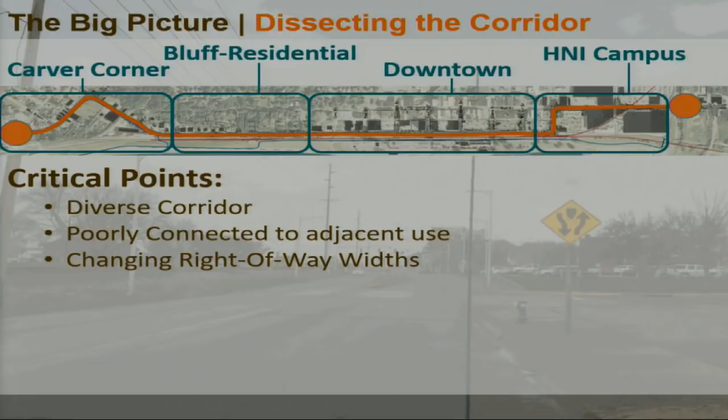So some of the design criteria that we tried to accomplish for the corridor as a whole: we looked at a 25-mile-an-hour posted design speed limit, 1 travel lane in each direction with center left turn lanes where applicable, a variable median width based on which district we're at, and also the available right-of-way and physical space that we can work with.

EMS access was always important to us, and that's one of the reasons we looked at mountable curbs and mow strips in the median areas. If you drive out there, you'll see it's an angled curb instead of a barrier curb, so that can be easily gone over. And here again, back-in angled parking on the north side of the road only.

We knew that parking was most important on that north side of the road because of all the businesses on that side, and we didn't have the capacity to put parking on both sides of the street, so we really focused our efforts on that side.

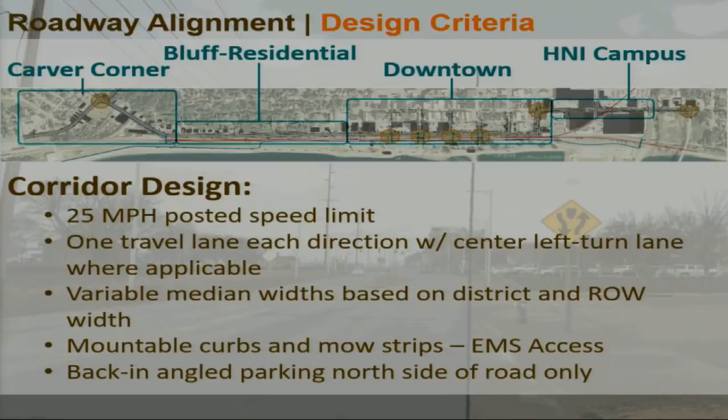So I'm going to go through a couple of the districts and talk about roadway widths. I'm going to talk a little bit about travel lanes, and a travel lane is really just the driving lane that you're going through. It's not a median, it's not the curb, it's not any buffer or slip zone areas, it's the lane that you go down.

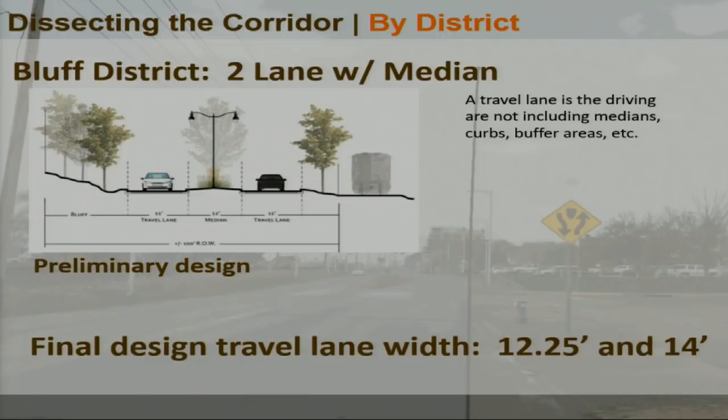Throughout the preliminary design process in the Bluffs district, we looked at accomplishing that travel lane with an 11-foot width. When we finally got into the final design, we actually widened those out to a 12.25-foot travel lane going upstream and a 14-foot travel lane going downstream in the Bluffs area, here again with those mountable curbs on the medians to be able to sneak around.

In the downtown area where we have parking, here again we looked at 11-foot drive lanes in the preliminary design process. Now the character is a little different depending on which side of the street you're on. On the downtown side, we have back-in angled parking, a buffer zone between that parking and the travel lane, and then the travel lane: 16.5 feet of parking, an 11-foot travel lane, and a 3-foot buffer lane on that side.

On the upstream side of things, instead of the 11-foot travel lane as per the preliminary design, we actually widened that out to about 12.25 feet.

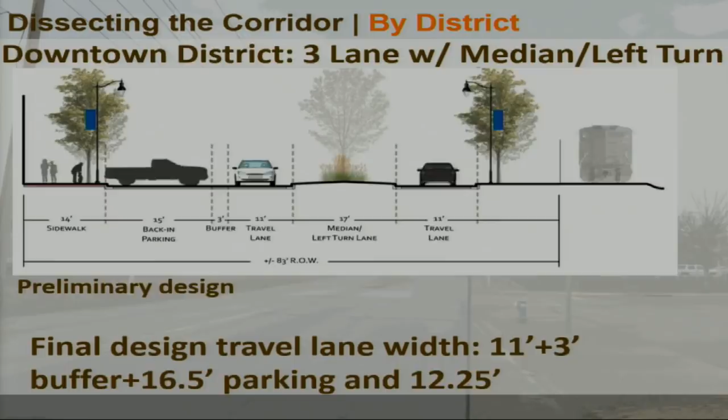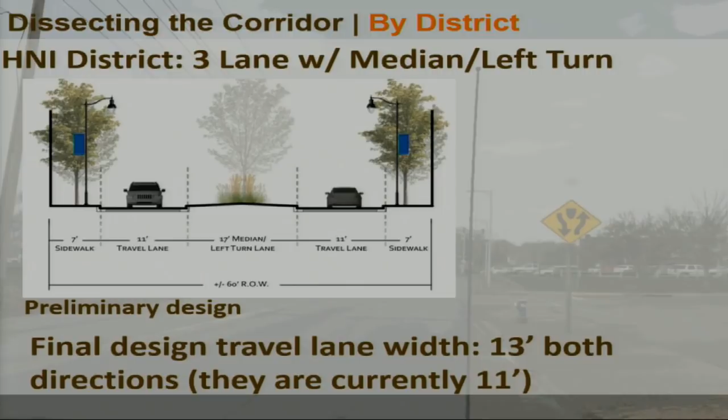And then the final district I want to talk about is what we're calling the HNI district. It's 2nd Street from Mulberry to Mad Creek. In the preliminary design here again, we looked at 11-foot travel lanes. Just to give you a point of reference, the lanes that are striped out there currently are 11 feet. It is a 4-lane section currently, but it's pretty tight through there. The final design travel lane width, which is not constructed yet because that's one of the next phases of construction, is actually 13-foot lanes through there with median and turn lanes.

So a little bit about the medians. All medians have a 6-inch high mountable curb. They also have at least 18 inches of concrete behind them. In many cases, the concrete's all the way across the median, or it's bricks in that area with concrete underneath the bricks, so it can handle a heavy load.

A lot of the reasoning we did that: it allows emergency access if needed to sneak by. It deters those drifters, the distracted drivers, the texters, when driving, keeps them within the lane. It guides plowing operations in the winter, and it also provides for future maintenance overlay. You know, 20, 30 years down the route, if we're putting an asphalt overlay, we still have the storm sewer capacity to it instead of doing it down flush or only a 1-inch curb.

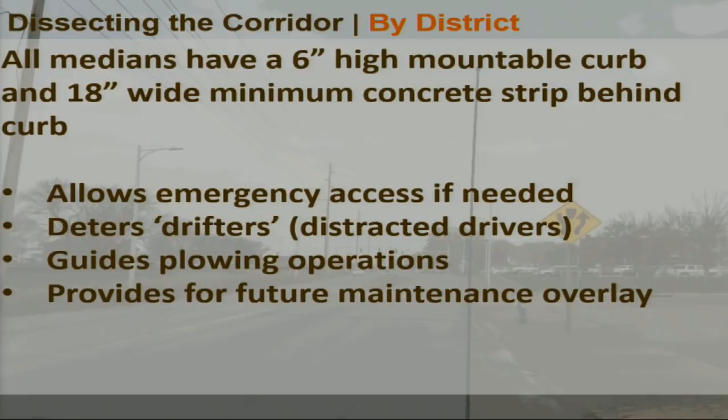We also don't want everybody and anybody just crossing over a median too. It's really designed for emergency access. It's not to jump, just do a U-turn anywhere. So it's that balance that we're looking for.

I'm going to turn it over to Joe Spradling. He's going to get into a little more of the technical side of things on some of the efforts.

Evening, Mayor and Council. Joe Spradling with HDR. We're a sub-consultant to Bolton & Menk on the design team. I'll direct your attention to the screen. I'm going to get, like Jim said, into a little bit more of the detail.

The area that we're looking at here is just to the downstream side of the bluff area, and this is at Broadway. Really what we're looking at here is how does this operate through the bluff area, especially in an emergency situation. There are 3 options, and really this first option is kind of the preferred option, what we want people to be doing. So if there's a stopped vehicle, a stalled vehicle, or there's an accident, we might have a stopped car.

But in certain situations where we don't have a stalled car, we want people to pull ahead to an area where EMS can move around. What we have shown here is an aerial ladder truck, which is the largest truck that the fire department has, around 42 feet in length. So you can see what our preferred alternative is: to have people pull up, you can pull around in the center and left turn lane. Conversely, or in addition to that, the vehicle could pull up into the parking that's just downstream of that, and the emergency vehicle can pass.

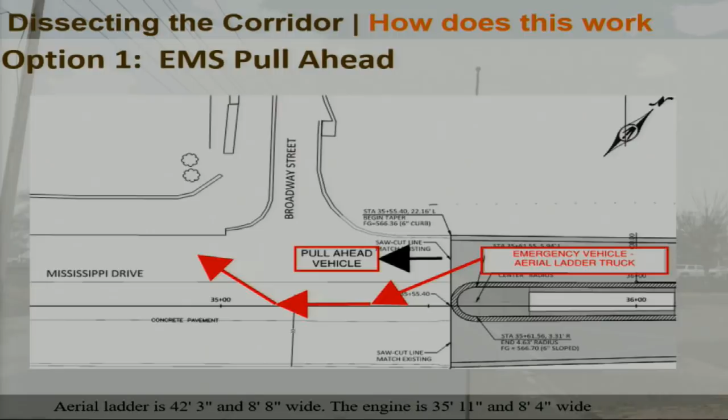Another option, if that's not possible, if there is a stalled vehicle or an accident in the lane, like Jim mentioned, the medians have mountable curb, so they're designed to drive over. Currently through the bluff area there is no landscaping, but this landscaping has been designed to be traversable as well. It's obviously not what you want to happen, but in an emergency situation that can happen. So this is just an option where the stalled vehicle or accident is in the lane: the fire truck can pull around onto the mountable curb, onto the median, and then around the stalled vehicle or accident, and then continue on.

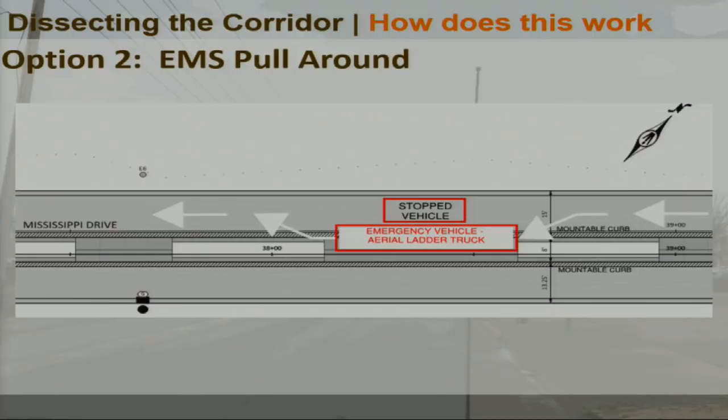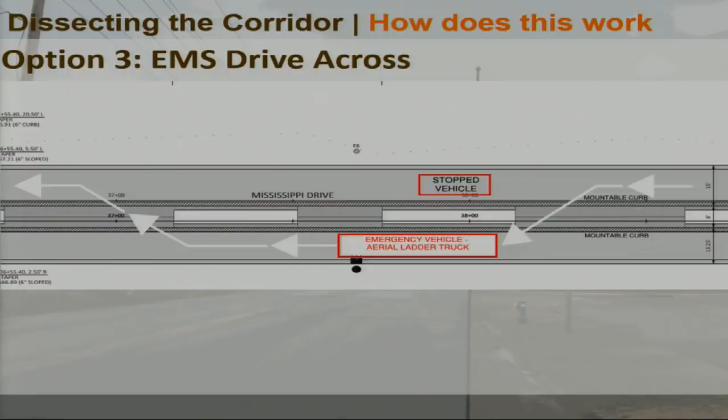Maybe just a couple things to point out here, a couple of the constraints that we were looking at through design of the bluff. We were very sensitive to impacting the bluff area itself, just with possible unstable soil. We were trying to avoid that area, impacting that area at all.

Also on the slope between the roadway and the railroad, there was some old retaining wall there that was kind of failing. You've probably seen that out there, and some of the slope has been failing as well. So we were trying to avoid large retaining walls that get very expensive, and conversely trying to do a slope that would work and tie down.

So you're not alone in Muscatine. There are other areas that do have one lane in each direction with a raised median.

This is an example in the Des Moines metro area, in Grimes, on State Highway 44 just west of town. It's very similar to the Bluff area, however you can notice the median actually has a barrier curb, so it's not technically traversable. But again, you can see the more narrow lanes, one lane in each direction, and there's a significant length, about 1,300 feet. In comparison, the Bluff area in Muscatine is about 700 feet in length.

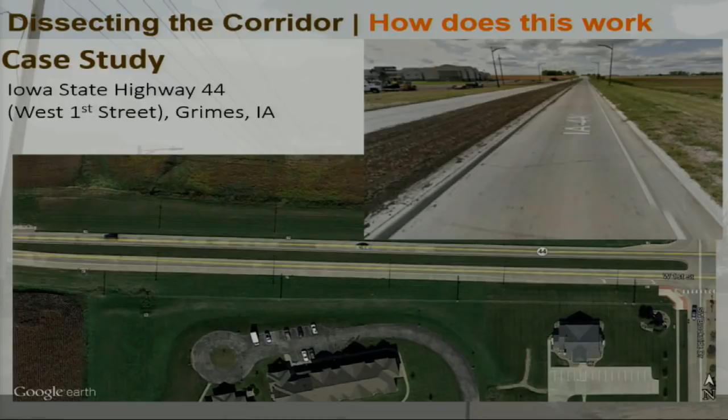Another case study we found is also in the Des Moines metro area, the City of Ankeny. This is a very similar situation - a barrier curb median, one travel lane in each direction. The amount of traffic on these is very similar to what you have on Mississippi Drive.

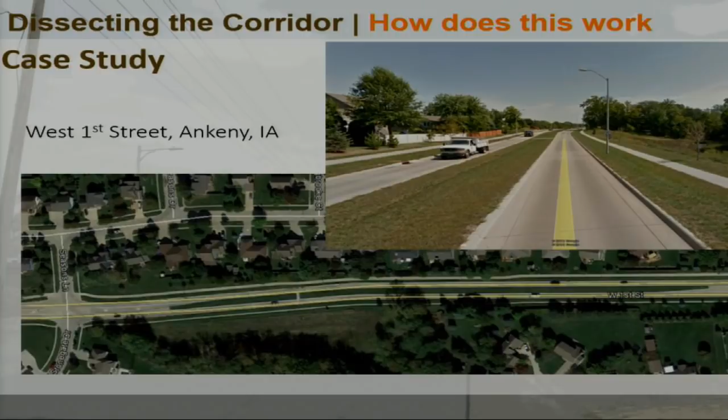One case study outside of Iowa is a very similar type of what they call right sizing the street. This is in Poughkeepsie, New York, on Raymond Avenue. The image on the left is the before picture - you can see there's 4 travel lanes undivided. It's a congested downtown area, very similar to downtown Muscatine, with parking on both sides. On the right is after the conversion - they took it down from 4 lanes to 2 lanes with a traversable, mountable median, and maintained parking on both sides of the road.

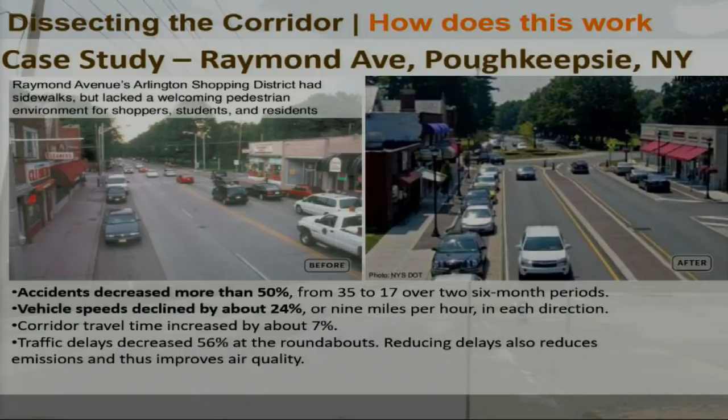What's interesting is what they saw - it's a case study because they've had it in place for about five years or so. They noticed accidents decreased by 50%, from 35 to 17, over two 6-month periods. They also saw vehicle speeds declining by about 24%, translating to about 9 miles per hour. They saw very minimal corridor travel time increase of about 7%, and traffic delays decreased 56%.

They also did some roundabouts - there's one you can see in the right picture up at the top, that's a roundabout they put in place. They saw traffic delays decrease by about 56% with that in place.

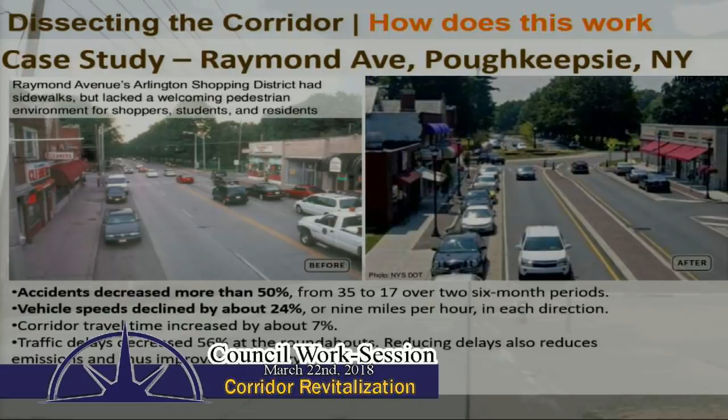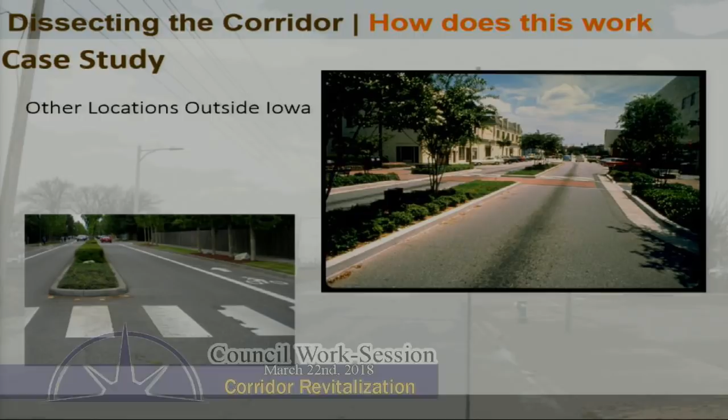These are just some other shots around the country showing that raised median look, kind of traffic calming. I think the biggest idea here is to improve pedestrian crossings. If we can narrow up the road, shorten the pedestrian crossings, calm that traffic and get them slowed down, it makes it safer for everyone - safer for pedestrians, safer for bicyclists, and also for the traveling public, motorists through the area.

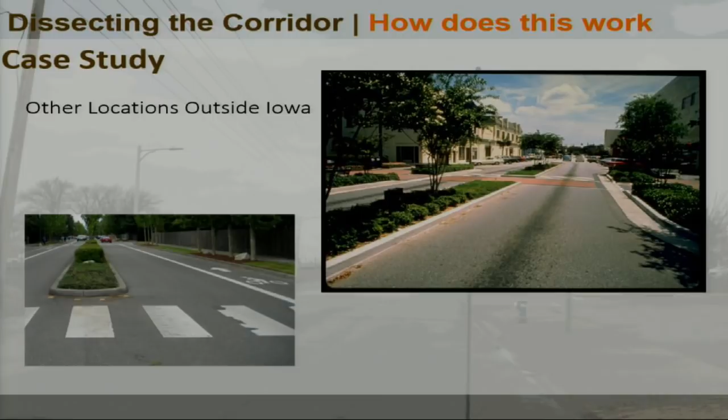Now Jim's going to come back up and talk a little bit about some of the intersection details and design that we went through.

Thanks, Joe. We're going to go quickly through some of the ideas this design was developed around. One idea is a pedestrian refuge and a shortened crossing. The noses at the medians at intersections go out just beyond the crosswalk, by design. We want to make sure there's an area for pedestrians - we call it a pedestrian refuge, a rest area for people who aren't necessarily able-bodied to get across the roadway safely, only having to cross one lane, one direction at a time.

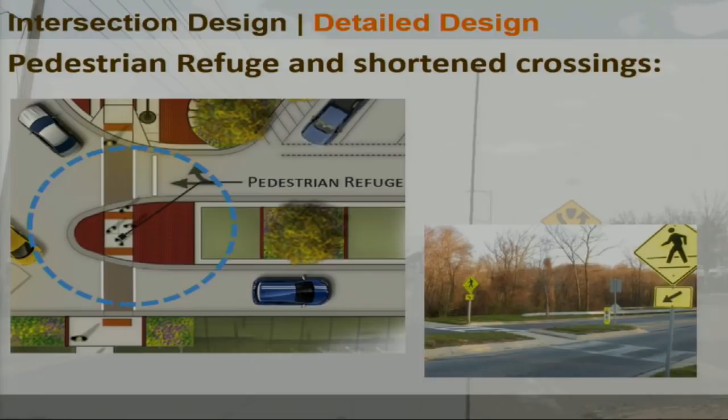These are designed so trucks can actually drive over the nose of the median. We know not everybody is a rock star as far as a truck driver, and we need to accommodate so they can still get around those intersections even if they aren't the best drivers. We designed these intersections specifically in the downtown area for service trucks to make easy turns into downtown - a beer truck, a beverage truck, a UPS truck, that level of effort.

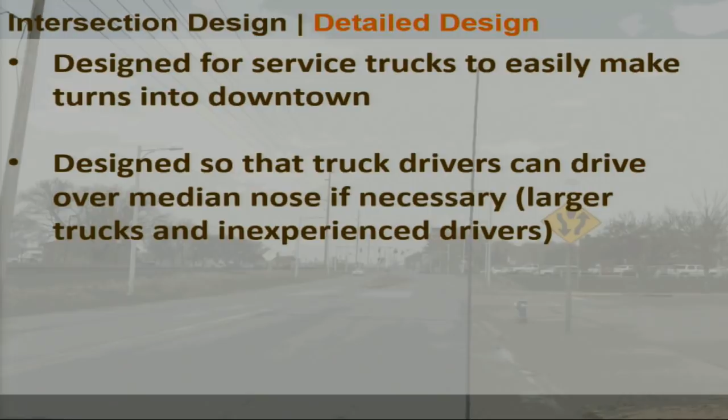There are 30-foot radiuses on the intersections. Just to give you an idea, the next block up at Second would probably be a 10 or 15-foot radius. So we designed it so truck drivers can go over those medians. We also made sure we didn't want to encourage making the whole downtown a truck route at the same time - it's that balance we're striving for.

So at Iowa Avenue, we have the new hotel entrance area right at the intersection there. I know there's been some questions and some problems making that turn as far as some driver confusion.

A couple things we're looking at doing, actually I was down there and they've done some of it already, is a reconfiguration of the median at the hotel entrance so that it's flatter, so trucks, if they for some reason can't make that right turn, can go right over it.

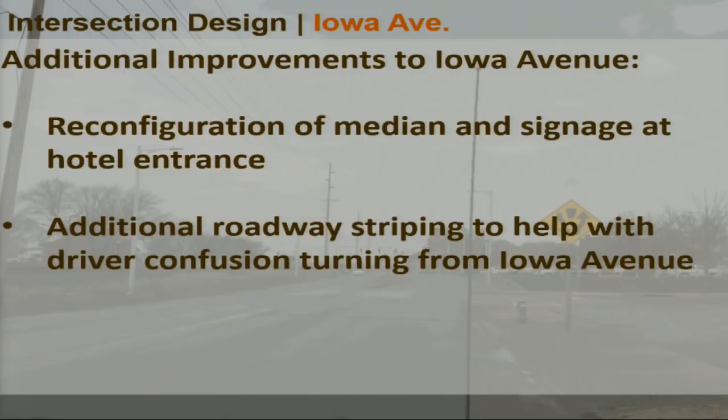We're also looking at additional roadway striping to help with driver confusion turning from Iowa Avenue. There's been discussion about people turning right off of Iowa and being confused whether to go into the hotel drive or the roadway itself. We're looking at additional dot striping to follow the arc to get people to stay on the public right of way instead of the hotel entrance.

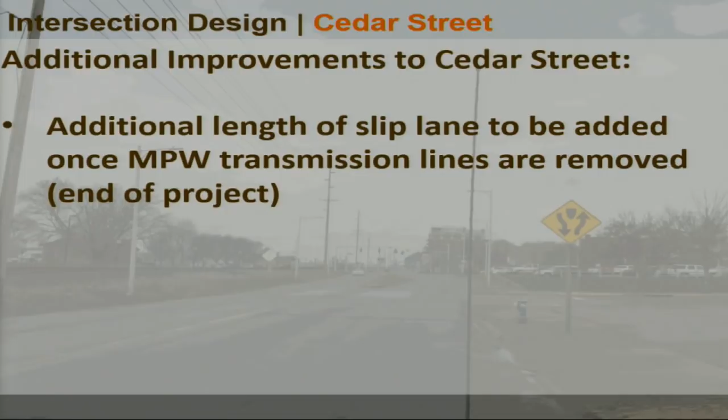At Cedar Street, one of the discussion points during the preliminary design process was the ability to stack some vehicles as you're turning right into Cedar in case there's a train. We've put in a fair amount of slip lane there, but don't think it's probably enough at this point to have a semi and a car there, or large boats and vehicles.

One of the issues at this point is transmission lines for Muscatine Power and Water. Those will be coming down, but not until the end of the project. Once those are down, we can add additional length to that slip lane, that right turn lane into the park.

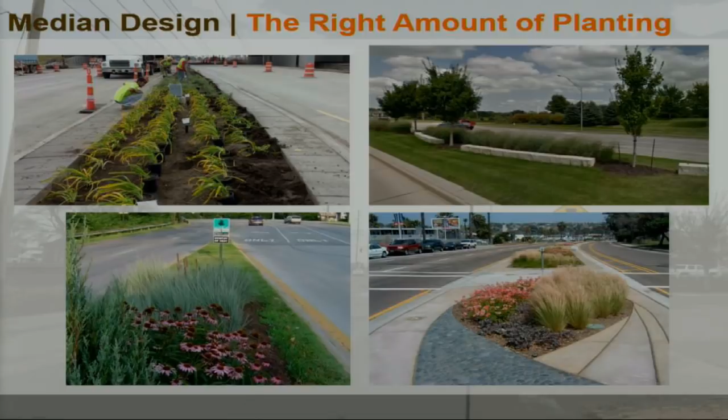During the design process, we talked a lot with the community about right sizing the amount of plantings. These are some of the images we showed as part of the design process to get people's votes on things. We showed a heavier level of landscaping versus a medium versus a light. The community preferred alternative for landscaping is on top, where there's less landscaping.

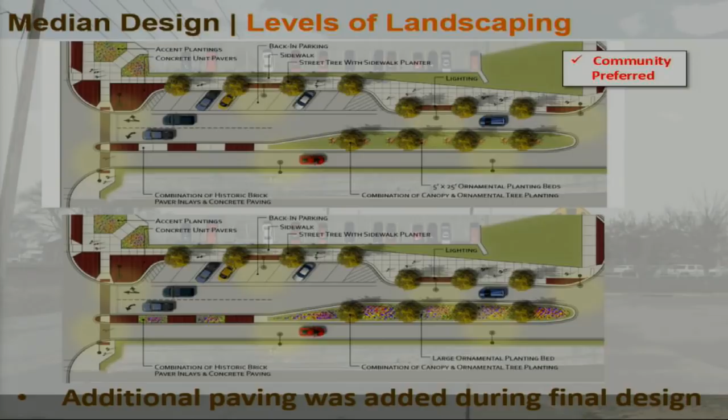Above and beyond what you see there, we actually added additional paving as part of the final design process to cut down on the amount of landscaping out there and really armor those median corners, or median noses.

Got a little bit of a frog in my throat here. So, okay.

Instead of the green grass that you see, we actually, in the final design, changed that into concrete instead of landscaping or lawn space. It cuts down on maintenance and gives you the opportunity to cross over that median much easier.

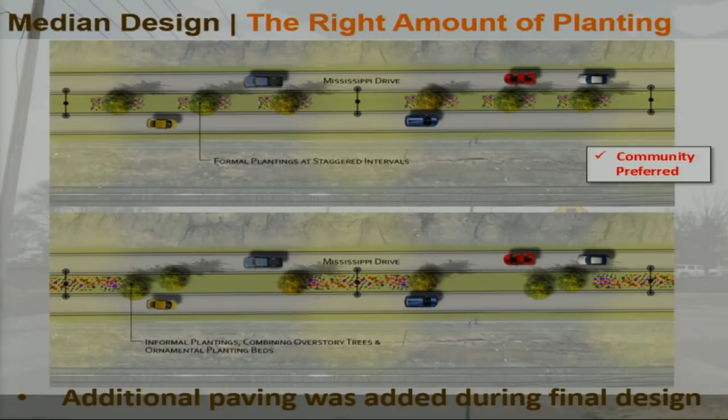Just quickly to touch base on quiet zones. Know that the quiet zone is in place now currently. Hopefully you don't hear a lot of train horns, although you may hear some now with construction going right next to the tracks. The conductor can always blare their horn if there's construction or safety concerns. It's not a never situation, but it's to cut it down as much as possible.

With the quiet zones and the construction phasing, we have two phases of quiet zones. One is the implementation of the quiet zone itself and opening some of the crossings in the downtown area. We have Iowa Avenue currently open. Cedar is closed and some of the pedestrian intersections are closed as well. The goal was to get that quiet zone open as quickly as possible, even though we're still under construction, rather than wait for the end and then implement it.

So that's why you see some closed crossings still. The quiet zone itself is still implemented, but those crossings aren't open for pedestrians and vehicles yet.

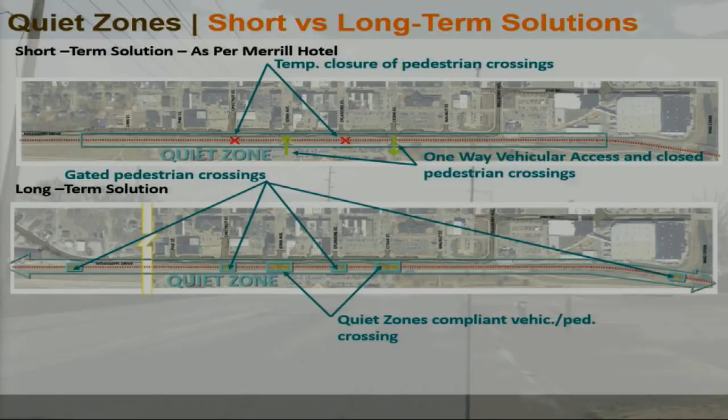So a recap on some design recommendations, community driven: a 2-lane roadway with turn lanes where appropriate, back-in angled parking, and a roundabout at 2nd and Mulberry. Just know that was pulled from the original project and will be bid separately to allow for resolution of the environmental work done as part of the Mississippi Drive project.

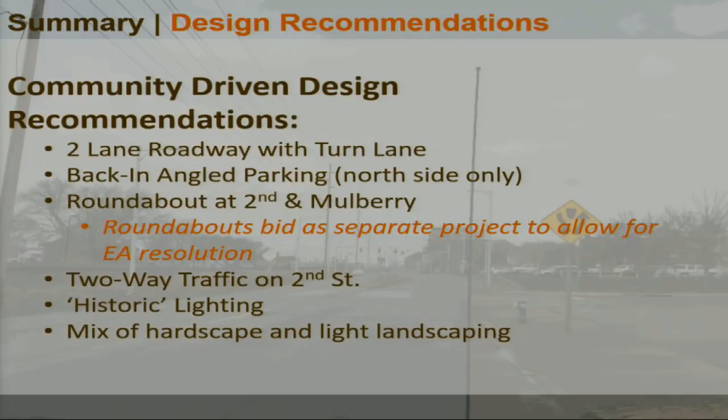2-way traffic on 2nd Street, the use of some aesthetic — I put historic in quotes — historic looking lighting, which is actually high efficiency LED lighting, and then a mix of hardscape and light landscaping.

Mississippi Drive is a work in progress, for sure, and ongoing construction has a major impact on its functionality and also the traffic flows throughout the area. The detour routes currently in place, especially on Iowa Avenue, really put a higher number of large vehicles on the downtown streets. That's a short-term thing. Once we're beyond construction, specifically on Mississippi, that's going to change drastically.

Our staging was developed to complete Iowa to Chestnut as a high priority with the new hotel going in there, along with some changes to crossings. That was deemed a higher priority, so that's why we did it.

One of the things that has changed in our staging was high water levels last spring. That forced us to change some of the stages—we did the bluff area first instead of the area around Chestnut.

We did phases. We wanted to maintain access as much as possible throughout the area during construction instead of just shutting the entire road, ripping it out, and letting it sit for 2 years. That's just not the goal at all.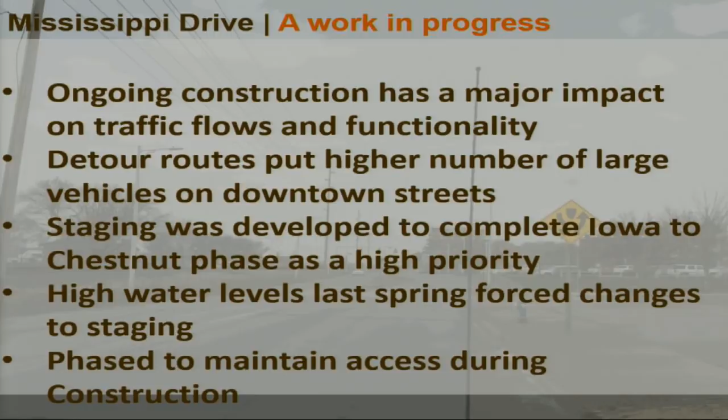So what's next? The next step is completion of Mississippi Drive to Mulberry, opening up access to the riverfront at Cedar. I know with one access point there it's a little more problematic until we double the access points once that's open. After that's completed, we're looking at construction of 2nd Street, broken up into I believe 4 different smaller phases to allow access throughout the construction process.

We're leapfrogging back and forth to make sure we have access along 2nd. And then there's completion of the roundabout at 2nd and Mulberry, which is under design right now and is slated to potentially be bid later this summer.

So that's a little bit of an overview of our progress to date. We've gone back looking at 2 years and were amazed at the number of meetings and input we've had on the project. Hopefully some of these slides may answer some of the questions that council and the community have had, but we're here to answer any other questions as well.

I'd like to pass on a few questions I've been getting from the community. One is there's been several references to community input. Could you share what you mean by that? Approximately how many public meetings were held, and when you say 67% chose this and 47% chose that, about how many people are we talking about who voted on those things?

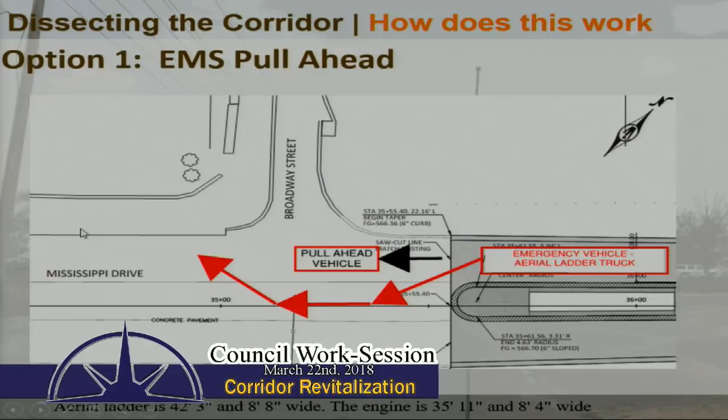That single line there, just above your red arrow, and then go up a ways, and then there's a double line. The double line's a retaining wall, and the single line is basically between those two - that's the parking. That's correct, yep. Parking is right up close to the retaining wall.

So if somebody pulled over there and stopped and made sure they had clear view, they could crank it back the other direction or pull up into one of the driveways along there. They're a little steep, but keep in mind we're only looking at two lanes instead of four for traffic.

Although the reason I had to make the first U-turn was because I had someone coming behind me and didn't have enough room for them to safely go around me. Just so you know, two U-turns within that time frame are illegal - you can only do one. So the assumption is that it will continue to be legal there to do a U-turn?

That would be my assumption at this point. And just a point of reference, we were curious how long the travel time was through the bluff area - at the legally posted speed of 25 miles an hour, which was a little hard for me because I'm a bit of a lead foot, it was between 15 and 18 seconds to get through the entire bluff area, which is a little over 700 feet.

I had a question on the distances between the light poles and the trees on the median in that section. Is it actually far enough apart to accommodate what you said, being able to pull over the top across the median, which I would hope we won't have to do. And in addition to that, I'll just ask both questions at once.

The spots where the plantings are going to go, and where I think maybe some additional decorative brickwork is going to go—not really sure, and I know it's not done—but I think this is something that would be good to explain so people understand it, because it's really only an issue now since it's not complete. If you mount that curb right now and go just a little too far over, you're going to bottom out. I watched a truck do that one day because they were impatient and didn't want to wait for the person backing into the parking spot—they jumped up on the curb and dragged the bottom of their vehicle for probably 10 to 15 feet, however long the dip is, then jumped back out and went around.

But how deep are those going to be? Are they going to be mounded when they have plantings in them, so that there's no drop in with your tire? Excellent question.

Some of those will be brick pavers, especially on the median noses, because we know those are the most abused. As for the light spacing question, the lights are centered in between about a 48-foot long concrete strip, so you have 24 feet on either side of that light, and then other 24-foot or more concrete strips along that entire stretch.

The plantings would be flush and or slightly mounded over once they're complete. That's been the main concern voiced to me, the ability for that to truly be a mountable curb with what appears to be a lot of impediments along the way.

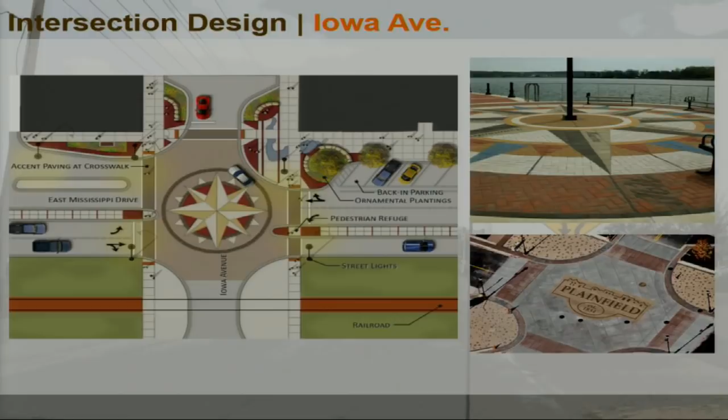And I think that's part of the confusion the public has had, is that they don't realize how much is not finished yet. So that's really what I think is valuable about this conversation, to explain we're not done there yet. Once we are done, it'll be a lot more clear and understandable, and travel will be easier because the signage and lines will be there.

And that is critical. If this were built in the middle of a cornfield, a rural highway, we would build it, stripe it, fill it back in, everything would be done, and then we'd open it and it would function at 100%. Because this is an existing downtown commercial area, an existing arterial street through downtown, we're making some sacrifices both in terms of staging, but also making sure we're substantially complete on most things and getting the road open as quickly as possible.

Sure. I just thought I would add real quick, one of the mistakes that's out there is that the city itself, as part of this project, is doing the signing.

Even though the plans showed that signing was on the end of those medians and everything else, shortly after we put that signing in and opened it up to traffic, we realized the signing probably isn't where it should be. So with the planned closure coming up in April, a lot of the signing stuck close on the end of those medians that hampers both sides of that turn movement, we're going to move those sign locations.